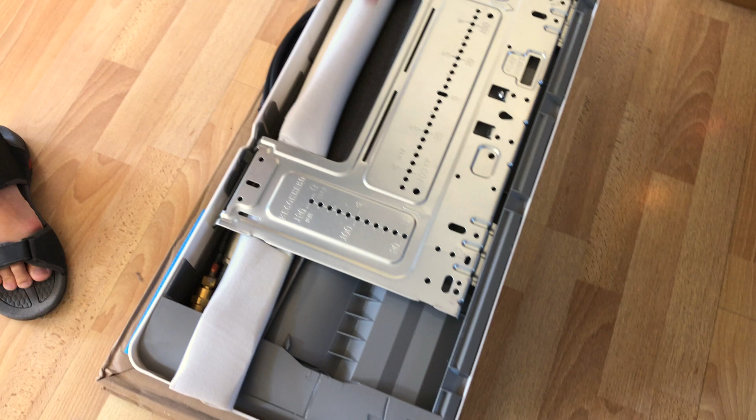Okay, so first thing I'm gonna do here is I'm gonna flip this thing up this way, and according to instruction, I have to remove this piece, this bracket. It's gonna get installed into the wall, and then this unit will be mounted onto this bracket. And they also provided a template so that you know where to drill the holes.

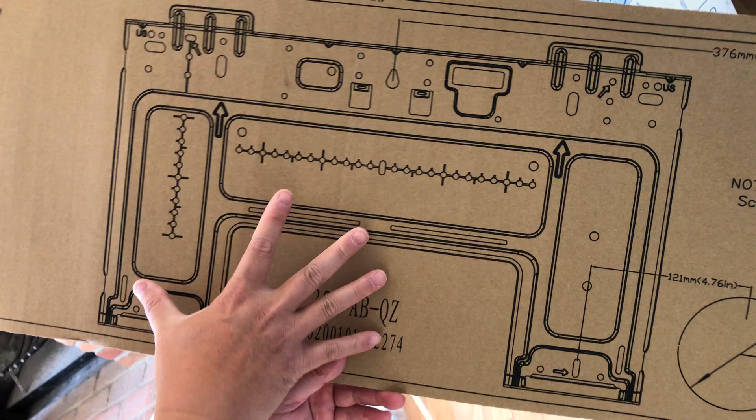So I think mainly you need 4 screws to hold the bracket in place. Maybe 2 on top, 2 on the bottom. And then you need this hole about 3.5 inches for these lines to go through. So let's go ahead and remove this. So let me get a screwdriver.

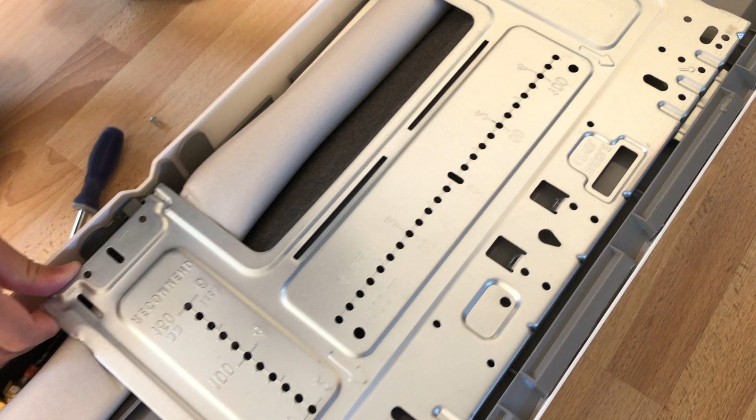Okay, and now this should come out. Okay, there it is. So this is a piece that's gonna get mounted to the wall like this, something like this. And that unit will mount to it.

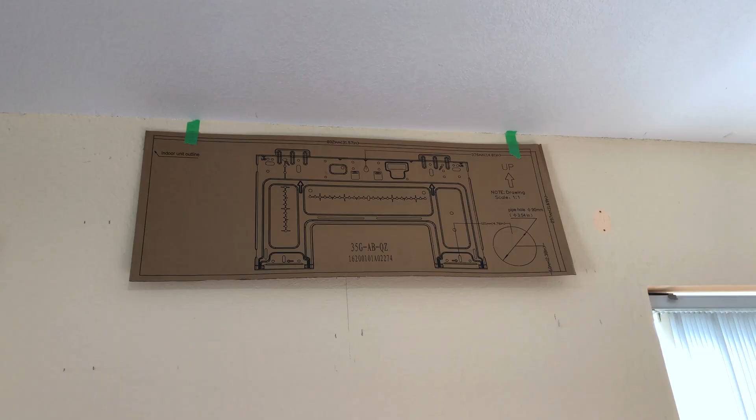Okay guys, so I finally found a location in my room where I'm gonna install the indoor unit. So this here is the complete template of the indoor unit. I have already used the level meter on this, so I know it's level. The most important thing is that I spend a lot of time with this stud finder. I want to know where the stud is behind this wall.

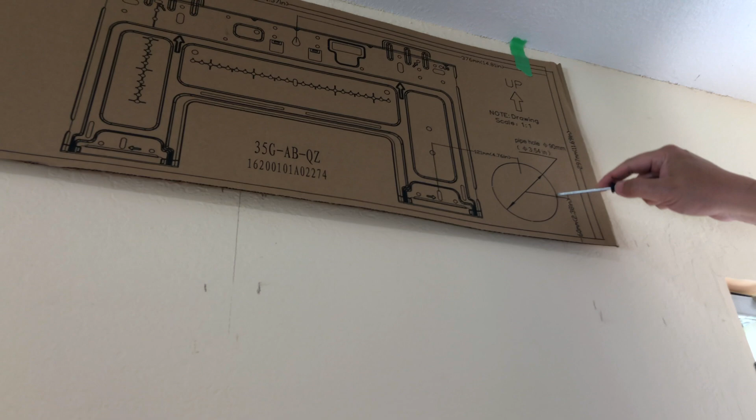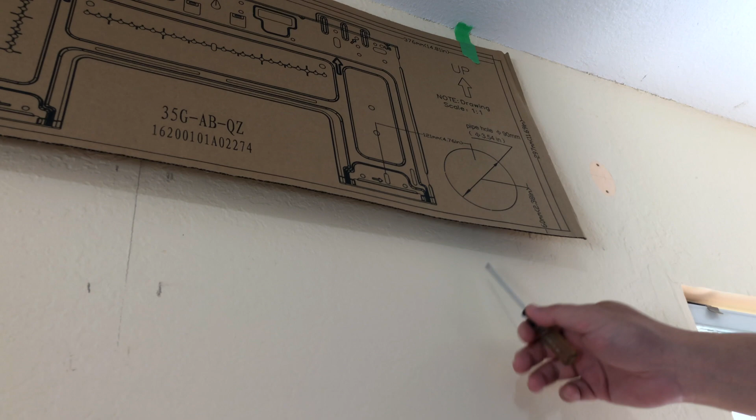The most important thing is that where you need to cut this hole here to feed the hose to the outside, you cannot have a stud behind this wall. That would be a big problem. So you gotta make sure there's nothing behind here where you're gonna cut this hole. The other part, that's okay. You can just put screws where there's 4 arrows here. 1, 2, 3, 4 to mount the bracket.

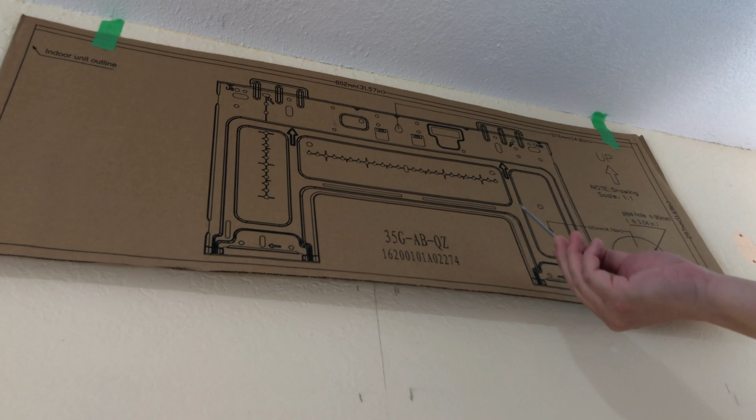But the most important thing is this cutout. You can't have a stud behind here. That would be a big problem. So I'm gonna use this little screwdriver here to go ahead and mark the hole where I need to drill. And then one here in the middle. Then one here. And then one here.

And then I'm gonna mark the location for the big hole cutout here. The top, the bottom, and the side. Okay, so if I lift it up, I can see all the locations. Okay, so we should be ready to drill holes.

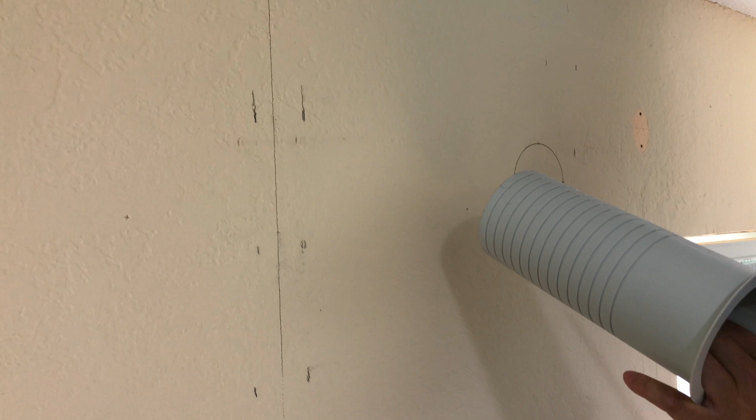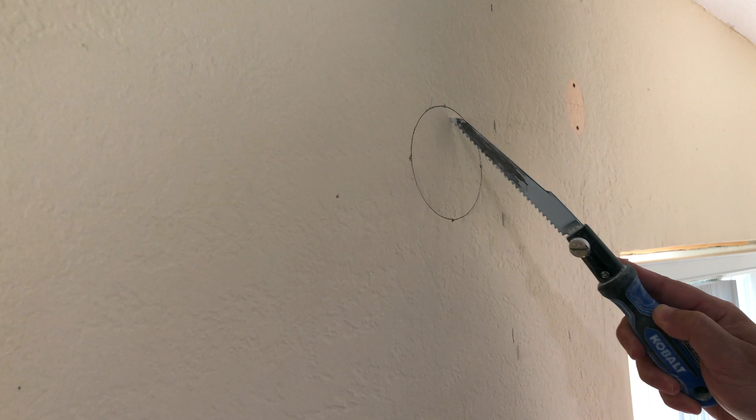Okay, so I used this piece right here that's provided in the box. I put it here so I was able to trace the perfect hole. So I'm going to use this handsaw to cut the hole right here. It doesn't have to be perfect because it's going to be covered up with the indoor unit. You're not going to see this when it's done. So here we go.

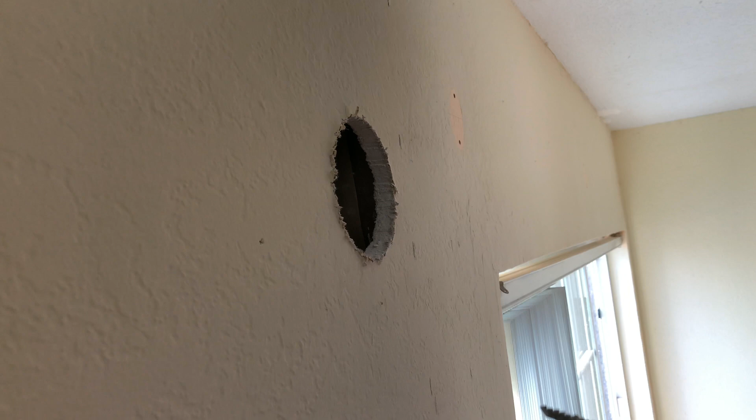Okay, there we have it, and luckily I can tell there's nothing behind here, just insulation and just the outside wall. So the next thing is to go ahead and drill a hole that is just a little bit below this hole, because we want the water to run out that way.

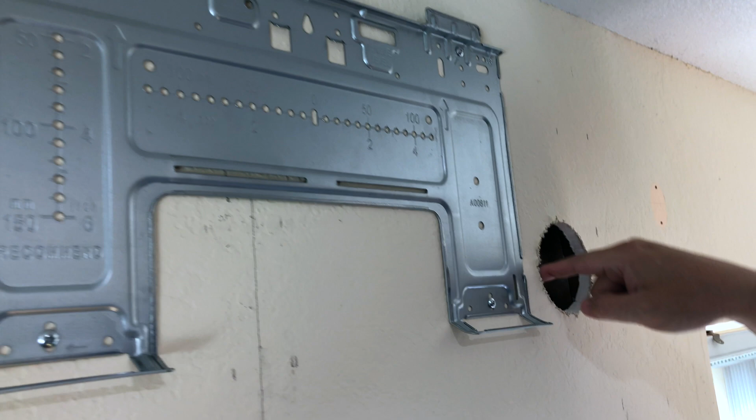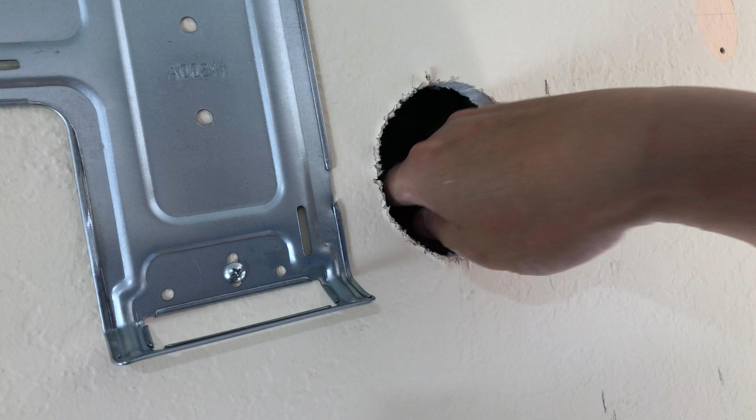Okay, so you can see that I have already mounted the bracket. It's very solid. So these are the 4 holes that I marked earlier. And this is where we're gonna feed all the pipe through. So now another tough part is to drill a hole on the outside wall.

I'm gonna remove this insulation right here with the X-Acto knife, just throw it out. And then I got to drill a hole the same size on the outside wall. And the problem is I have a stucco wall, so that's gonna be very hard to drill. Okay, so the next thing is I am going to create the same size hole on the outside wall. I have already cleaned out the inside here.

There was some insulation, so I got rid of that. So it's nice and clean.

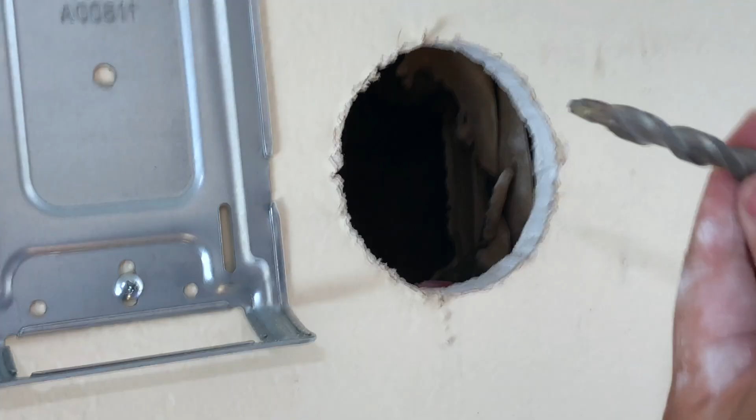I'm using this masonry bit because my outside wall is stucco, so I can't just use a wood bit. I'm going to drill a center hole, then go outside and cut a circle the same shape, which will be the center one. But because there's going to be water coming out of this unit, they want this outside hole to be slightly lower so water can run down. So I'm going to do this not centered, but a little bit lower, like that.

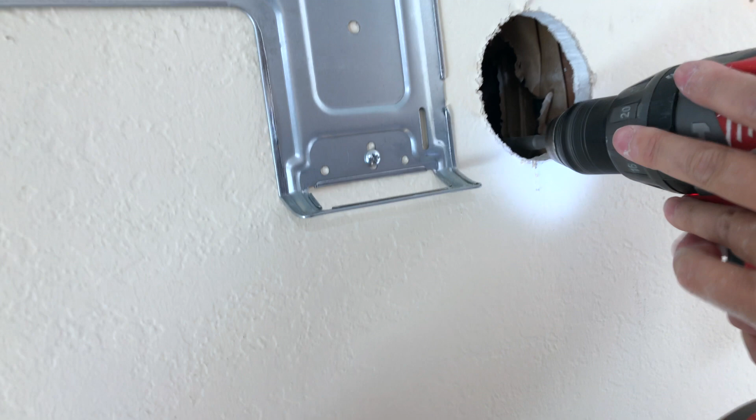This will be my reference. This bit is not long enough, so I'm going to push it out a little bit. Okay, here we go. Okay, it's through, you can see the light. So that's going to be my center reference hole, and I'm going to use that to make a circle the same size as this on the outside wall.

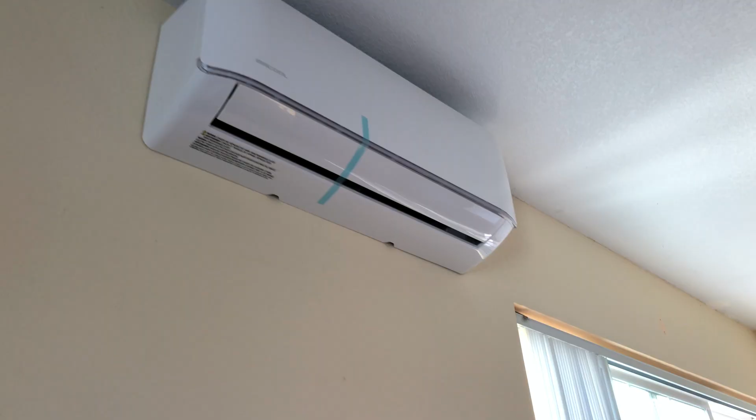Okay guys, so after drilling the hole on the outside wall, we're able to mount this unit now. All we have to do is feed the electrical and hose from behind this unit through the wall to the outside, and this thing simply snaps into the bracket that we mounted earlier. It's actually very simple to do. Nobody should have trouble doing this one. So this is what it looks like now.

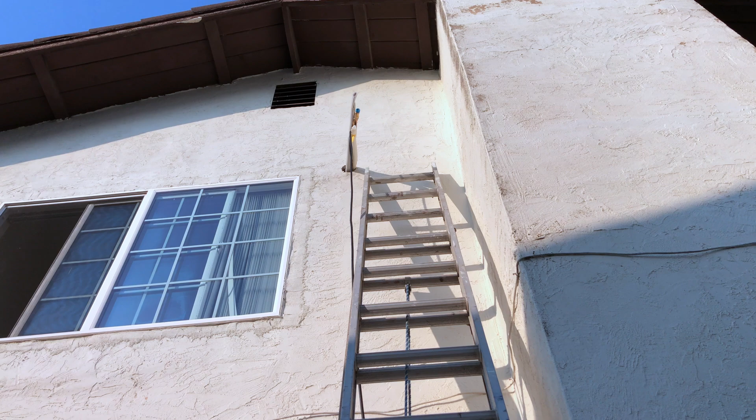Now I'm going to do a whole bunch of hookup outside with the outside unit. So you can see that from the outside, this is what it looked like. All the hose went through the wall. For me, I didn't have a good way of making that hole, so what I did was I used the masonry drill and drilled a whole bunch of holes around a circle, then used a hammer to create that hole. So it's probably not the prettiest thing, but it should be okay.

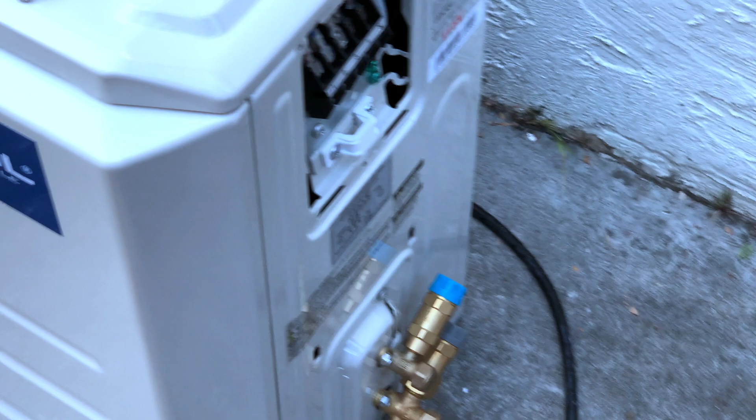So now we've got to run all those hoses and electrical to the unit on the outside down here, and it all needs to go right here. The electrical needs to go here, and those two condenser refrigerant hoses need to be here. So that's the next thing.

So you can see that we finally finished the installation. I went online to Amazon and found these covers for these refrigerant hoses to cover it up. That way it looks more aesthetically pleasing. So there you have it.

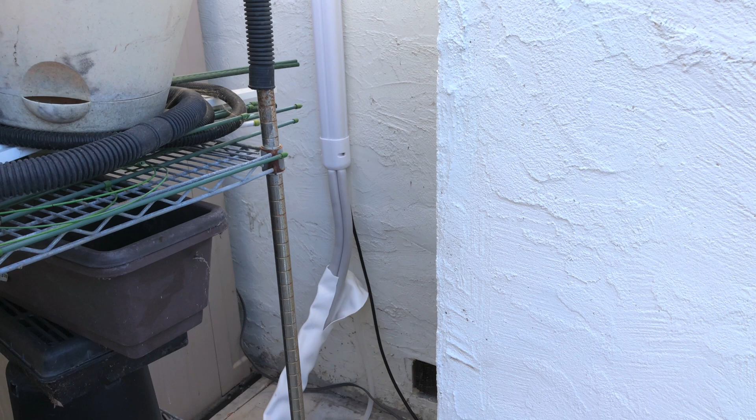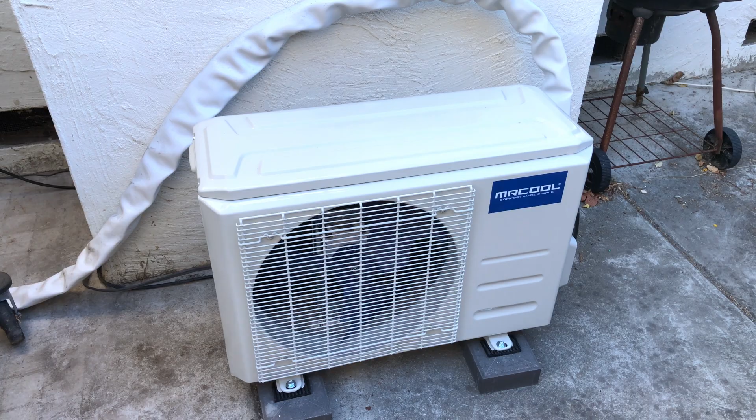Straight down, and I have a little bit of extra refrigerant, and it goes to my, I guess they call it the condenser, this outdoor unit. So there it is right there.

Alright, so as you can see, I'm finally done with the installation. It's working great. I even got the Wi-Fi to work. I can control this unit with my phone, which is very cool. So everything's great. I would not say that this is a difficult installation, but it was tedious for me.

One thing is, hopefully I don't have any problem down the line, because I tried to contact MRCOOL many times with voicemail messages and email, and I got zero response. I'm thinking that's not a good look for a company. I don't know what's going on there. So hopefully there's no issue going forward.